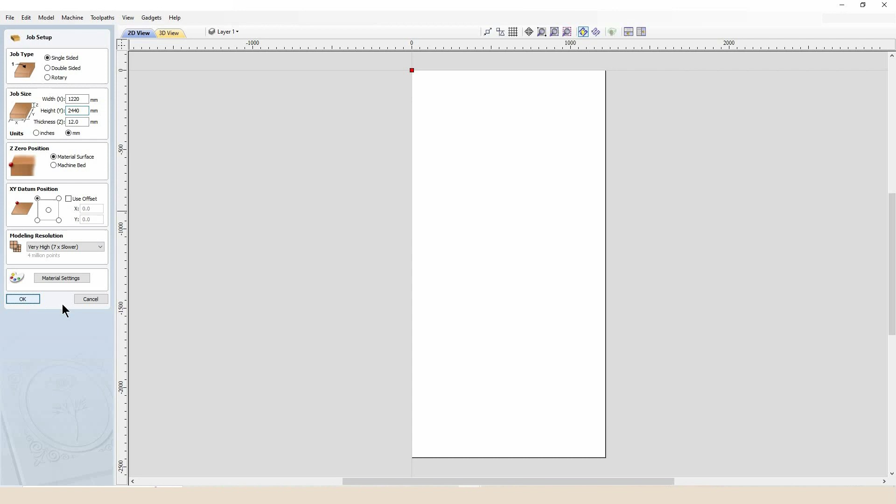So we're going to dive straight into the Gadget area of VCarve Pro, and we're going to go down to Box Creator. Now I want to show you an example of how Box Creator kind of functions. Now the first thing I'm going to do, it's going to throw up an error, because our box components will not fit completely on this sheet.

Okay, so these are our basic parameters. We're going to create all sides to our cube. We're going to be using a 5mm end mill for this one, and I would like a tab lid and square tabs. So for this particular box, we're going to make an allowance of 0.1. You are probably going to need to play with this allowance feature to get your finger tabs to fit exactly how you want them. So you'll notice it's now saying that it couldn't arrange quick enough, which basically means all of these parts don't fit on this sheet.

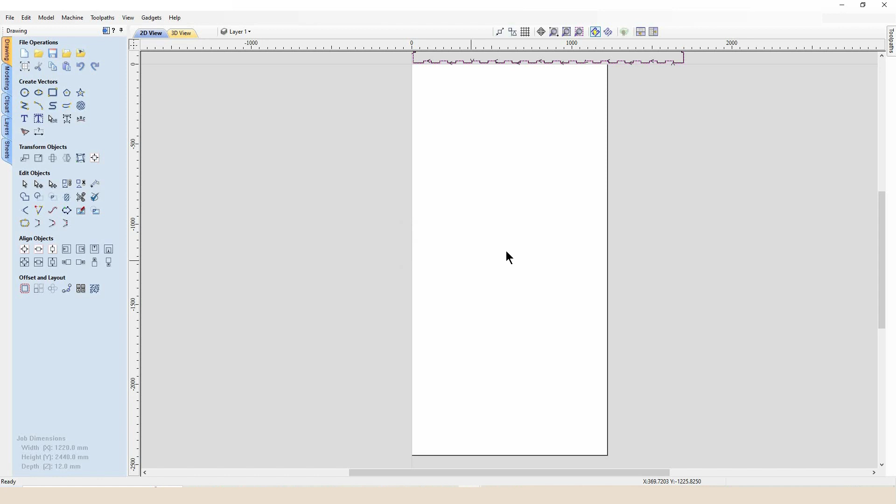So I'm going to delete the toolpath that is created, and I'm going to delete all of the parts. Now, the quickest and easiest way to get around this is to create a much bigger workspace. So I'm going to change that to 8-foot by 8-foot square, and that should be big enough now.

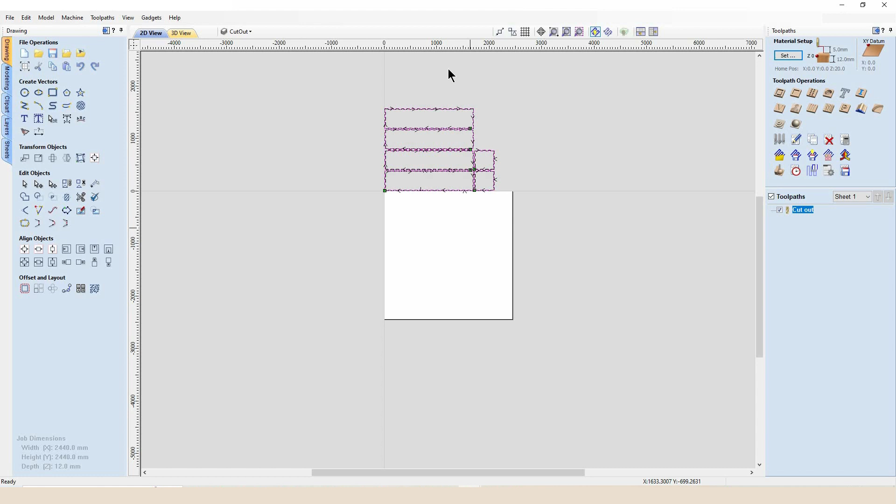When I go back into our Box Creator gadget, it's kept our 1685 in width, our 375 in height and depth. It's kept our joints. We just need to re-input the 0.1 allowance. We want a tabbed lid and we want square joints. Now what it's done is it's repopulated all of our parts.

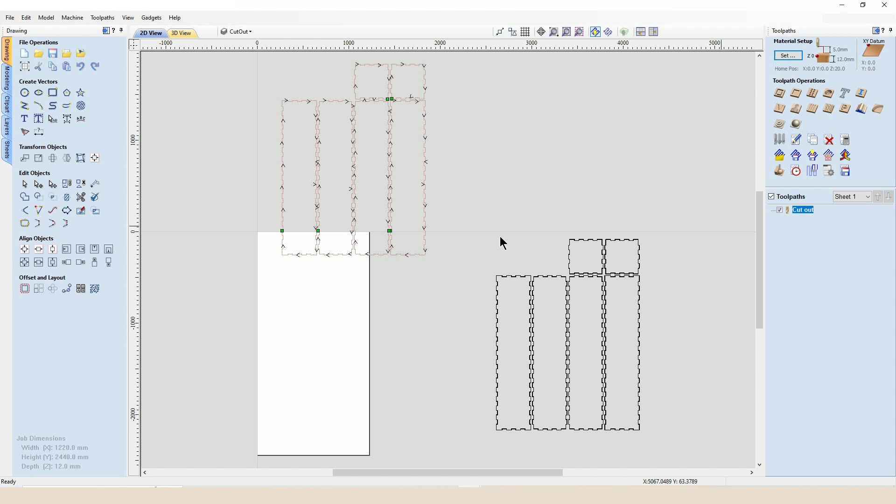So I'm going to pick those up and I'm going to turn those 90 degrees. And if I come across to our toolpath and recalculate that, that's now going to recalculate all of our parts together. So for this exercise, I'm just going to drag it down to here, out of the way. And I'm going to come back over to our job dimensions and I'm going to change that back to an 8x4 sheet. Okay, so that's a really easy and quick way to cheat the system and effectively get what you need. All right, so you can see there's all of our 50mm tabs, there's all of our box components.

So the next step is going to be creating some smaller boxes, which is going to sit on the inside of our flight case, and that will be used then to hold our X-beam in position. So for this box, we are going to have a width of 400mm. We're going to have a depth of 95mm. We're going to have a height of 80mm and a joint width of 20mm. Again, we're going to have the same 0.1 allowance. We're going to use the same 5mm end mill. And again, selecting the square tabs and a tabbed lid.

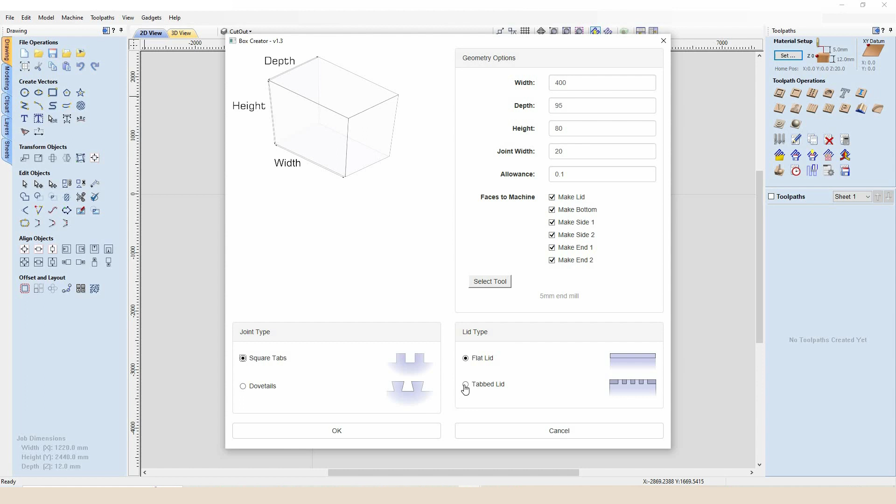And you will see there is our parts. So we'll orientate those by 90 degrees. And we'll drop those there. Okay, again, I'm quite happy to delete this pre-predicted toolpath because we're going to do something quite clever now, which is we're going to re-nest and we're going to use VCarve then to tell us how many components we can fit into one sheet.

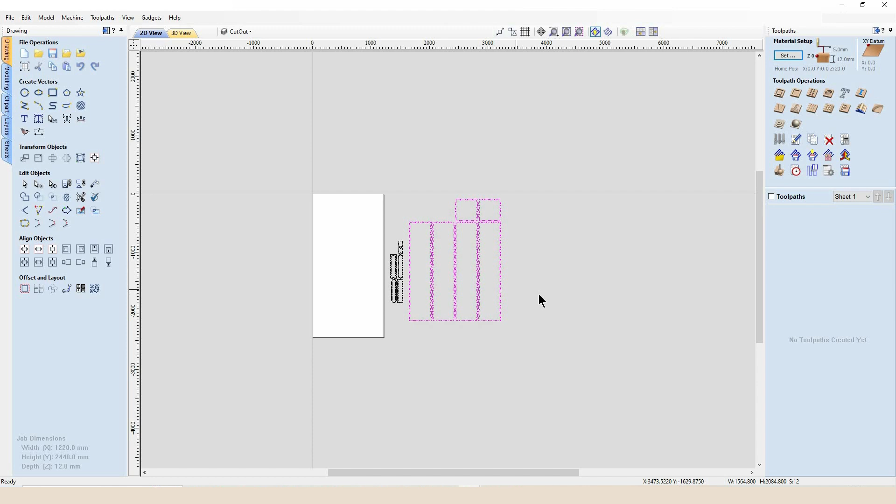So if I start at the bottom right of my screen, hold the left mouse button down and come up and drag and select all of those parts, I'm going to come across to our nesting function. Okay. So we'll start off at the top. We've got our 5mm tool. We want to create a clearance between each part of 8mm, and we want a border gap around the edge of our sheet of 20mm, which is going to allow us then to fix our sheet down.

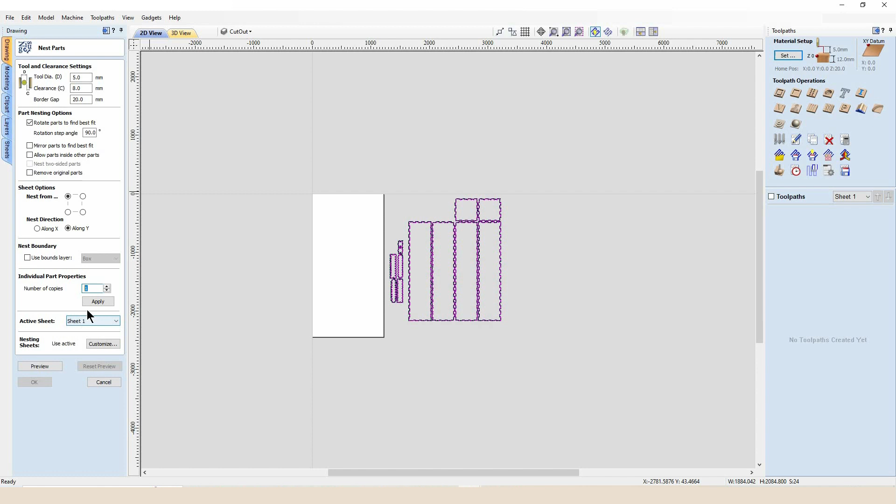Now, just be warned, if you're going to try and cut a part, which is full 8-foot on the sheet, by having the border gap of 20mm, it won't allow you because it believes that part will no longer fit on your sheet. So we're going to allow it to rotate our parts by 90 degrees for best fit. And we want a number of copies. We want just one for the time being. So we're going to select apply.

And if we preview that, that will then bring up sheet 2, which has a number of our parts, and then sheet 3. Okay, so I'm fairly happy with that for the time being.

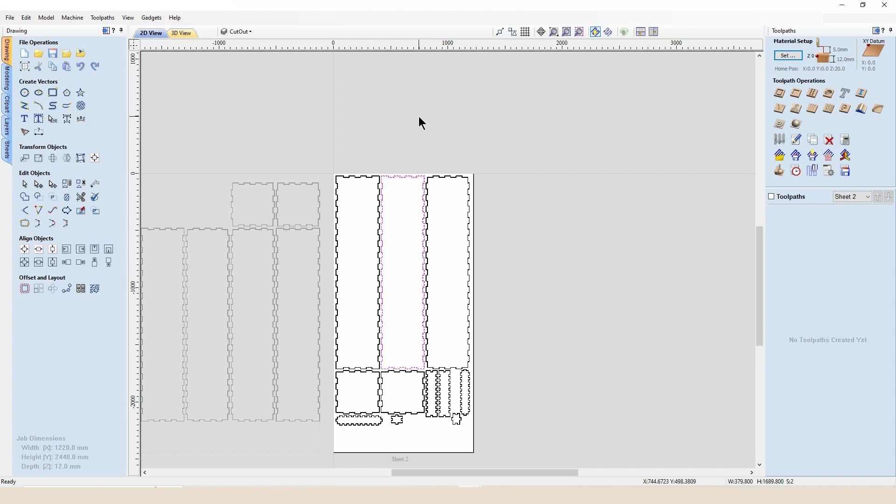However, I'm going to make some changes. So this part here, I actually want on sheet 2, which is going to be our lid. So if I hold Control and press X, then double click on sheet 3, and then hold Control again and press V, that's now copied and pasted that part.

I'm now going to select these parts for our side piece. I'm going to hold Control and press X again. I'm going to come back to sheet 2. I'm going to hold Control, press V, and then I've got the parts in the correct orientation.

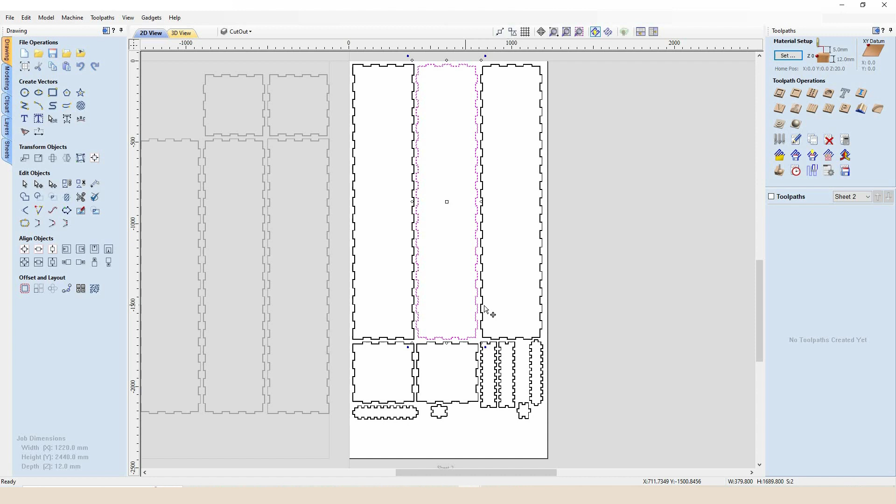So this will be our base, and this will be our 2 sides. This is going to be our ends, and this will be one of the internal boxes. And again, I'm just going to shuffle this around to get it just how I want it. And then effectively we have a top and base and the 2 sides.

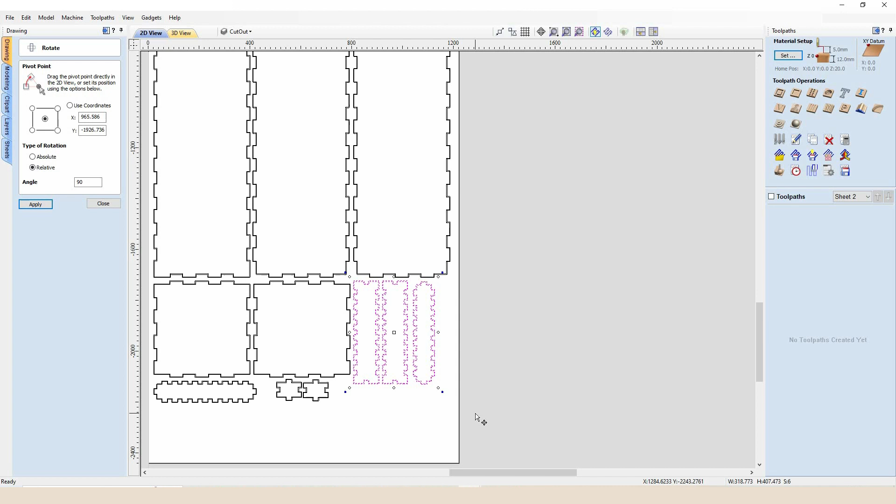Now I need 2 of these internal boxes. So if I just bring this along, shuffle it around so it's reorientated for me. I'm going to select these and hold Control and press C for copy and then V for paste.

And I'll move these bits along here out of the way, just so I know what I'm looking at. And I'm going to hold Control again, press C and V to recopy these parts. And now I'm just going to shuffle these around and reorientate them so they fit on our sheet.

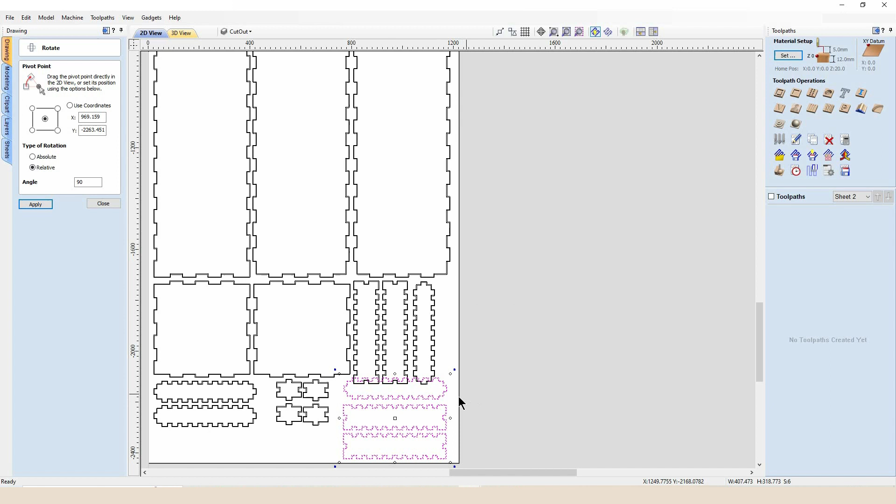Okay, so very simply, that is the main components of our job. We're now going to start to add some of the different features to make this flight case function.

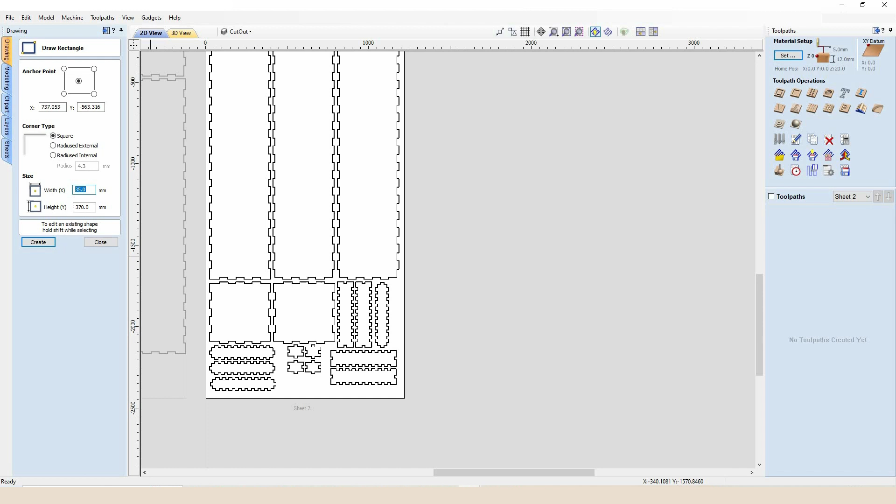So I'm going to start by adding the handle holes for our flight case handles. So those handle holes are going to be 130 millimeters by 80 millimeters. And I'm going to drop one in there, and I'm going to drop one in there.

So if I start by selecting our first handle hole and then holding shift, I'm going to select the actual vector. I'm going to come over to our alignment tools and I'm going to center the object within this vector. So that's very, very simple and easy.

Again, I'm going to select this handle hole and I'm going to select this vector. And again, I'm going to center that one. That's those objects done. The next thing I need to look at is then going to be the cutout apertures for our flight case wheels.

So I'm going to create a square with square corners, and I want, well, I'm actually creating a rectangle. I want our rectangle to be 35 millimeters on the x-axis and 55 millimeters on the y-axis. And again, I'm going to drop one there, and one there, and one there and one there.

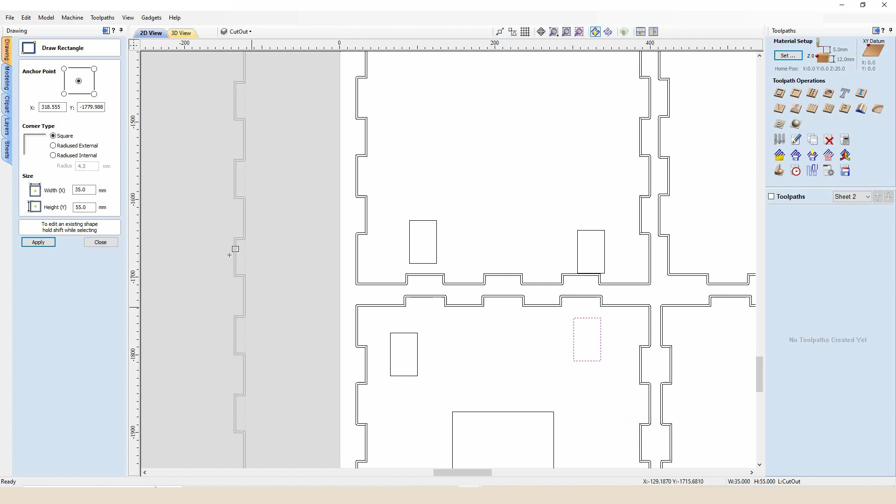So with a little bit of shuffling, I'm going to select one of my flight case wheel apertures and I'm going to select the vector which it will sit within. And I want it to sit in line with the bottom.

All I'm going to do now is using the direction keys on the keyboard, I'm going to shuffle this into place so it sits bang on this vector line. So you need to zoom in and zoom in and zoom in. Once you get used to doing it, it's not too bad. It's a little bit fiddly at first.

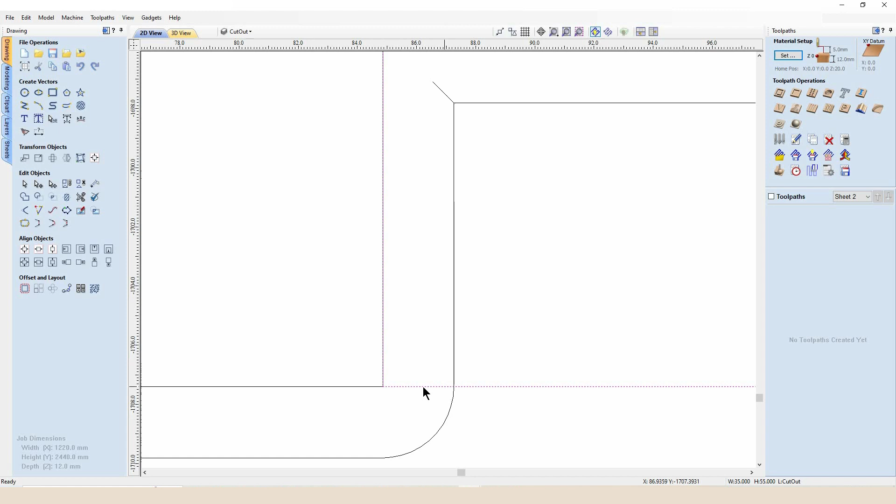Okay, so I'm really happy with that. As I zoom in now, I'm very, very close. I'm onto that line. So you'll notice the new vector, which we're going to cut, our little internal profile, sits perfectly in line with the bottom of the vector. And I'm going to orientate it to sit inside of this tab here.

So we'll do exactly the same again. We'll select this hole. Holding shift, we'll select our outside vector. And we'll use align to the bottom. And we'll just nudge that across until we're happy with the placement where these two vectors are sitting smack bang over the top of each other.

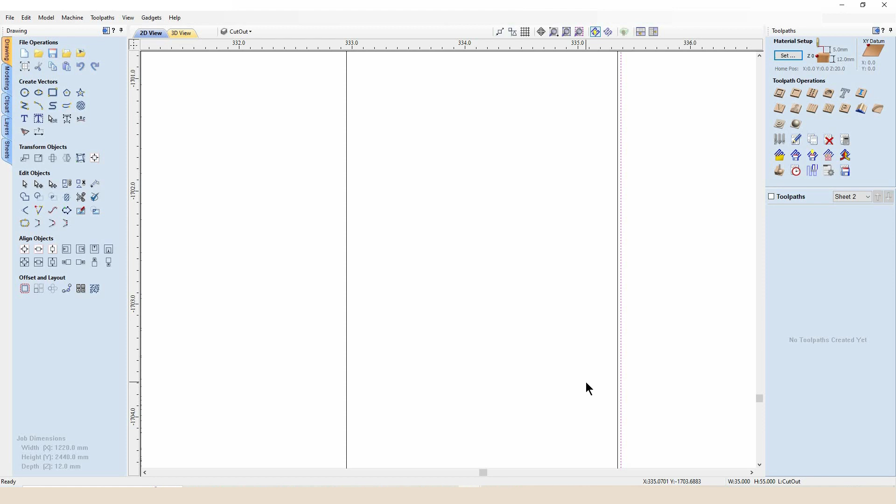So again, for these bottom wheel cutouts, we'll follow exactly the same principle. We'll select it to the top.

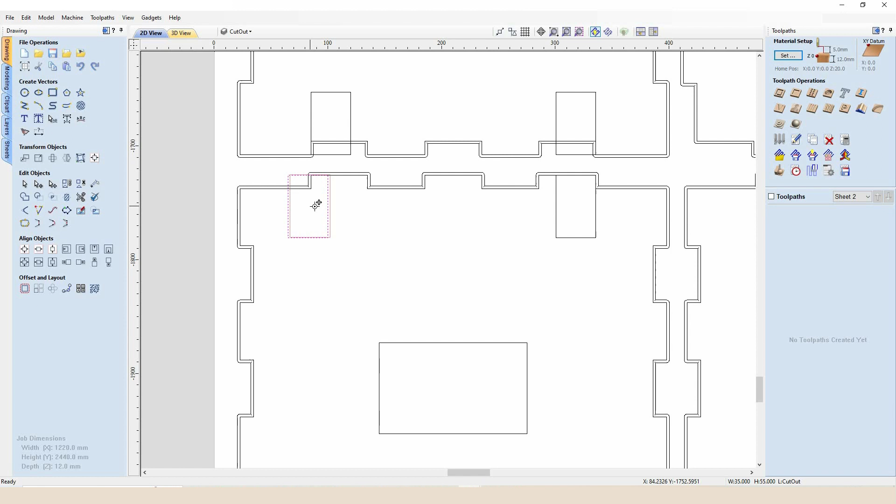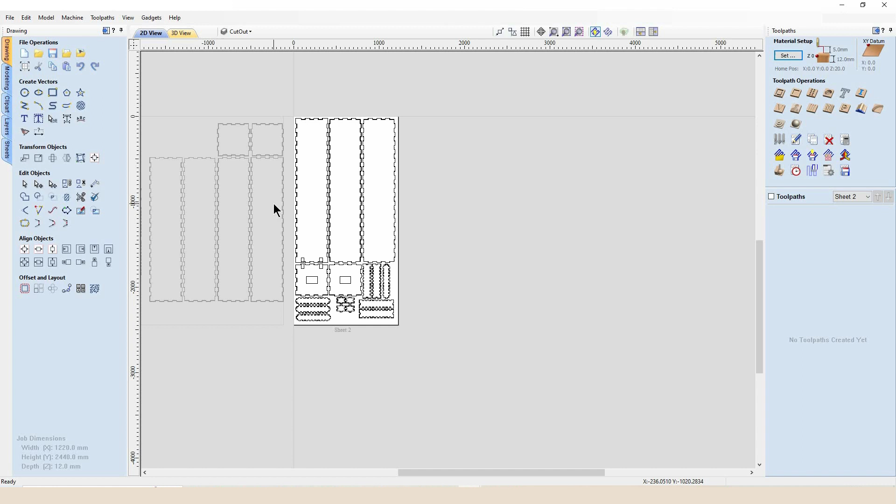At this stage, I've got all of the main components designed for the outside of our flight case, and I've also designed the inside parts which are going to hold our X-beam inside the flight case. We've created some of the different handle hole features and the internal cuts for our small wheels. We're going to go ahead now and design the extra auxiliary parts which are going to go inside the flight case.

So the next part I'm going to design is some plates that will sit inside of the X-beam and hold the upper part of the X-beam into the flight case. We're going to have two parts at 180 millimeters on the X-axis and 390 millimeters on the Y-axis. So I'll drop one there.

We're going to make some modifications to this to fit over the inside of our X-beam, there's a small electrical feature that sits there. And what we're going to do is create a cutout on all 4 of the corners on both parts, so no matter how you've got this part configured, you're never going to clash with it.

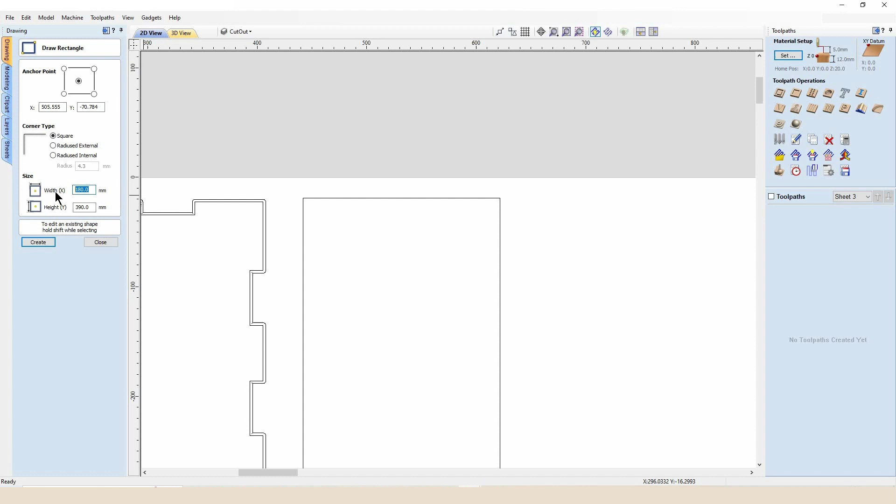So I'm going to make a small extra box, which is going to be 15 millimeters on the X-axis and only 10 millimeters on the Y. And we'll just copy and paste, and set one up for each of the corners.

Again, using the alignment tools, very simply, we're going to select our part, select our outer vector, and drop those into place. Nice and simple, and it's accurate as well, that's the main thing.

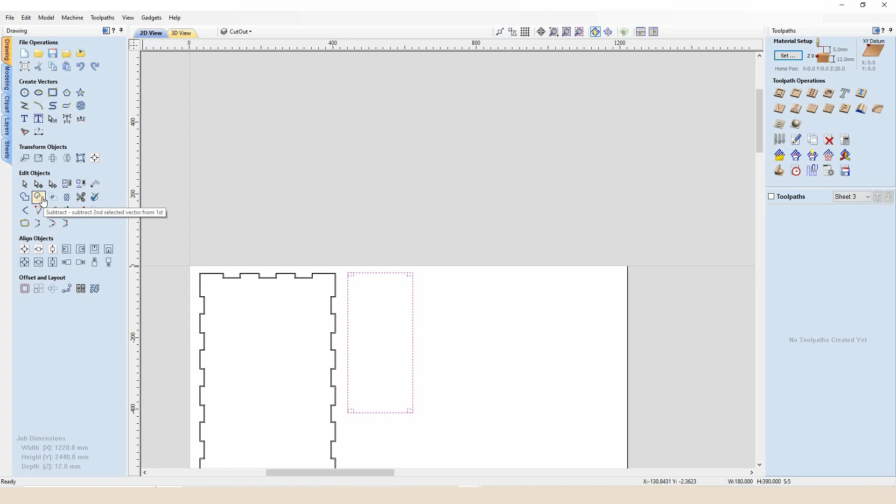So if I start again down the right-hand side, holding the left mouse button down, I can select all of those, and I'm going to come over to the subtract second selected vectors. And what it's done, very quickly, is cut out all of those extra vector lines that we didn't want. So that's nice and neat and an easy, quick way of doing it.

So we're going to cut some holes in this box now, that is going to sit over some internal bolts. So we want a 9mm hole. So we'll select that one there.

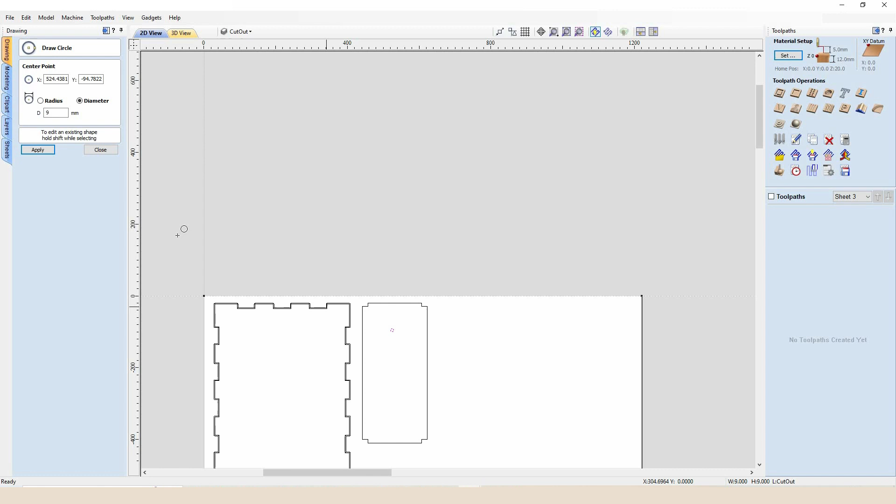And these holes are going to be offset, which will give you a center measurement. They're going to be offset by 261 millimeters. So I've got both of those holes there, I'm going to group those.

For the moment, I will just center them into my board. Okay, so now I'm going to take those holes, and again select our outside vector, and center those 2 holes to sit within this little fixing plate.

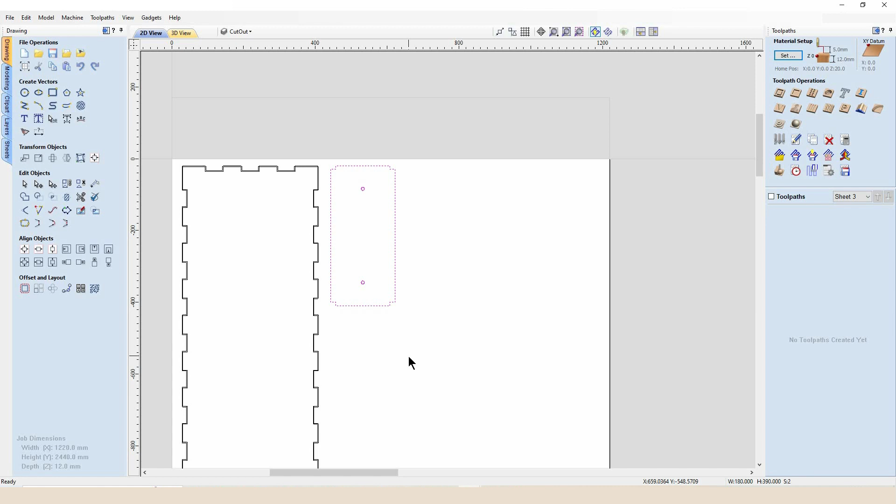Okay, so nice and simply then, I'm going to grab both of these. I'm going to press G on the keypad to group them together, and I'm going to... no, then I'm going to array copy them.

I want 2 of those on the X-axis, and I'm going to gap them to be 7 millimeters apart. Okay, so nice and simply, we're going to do that.

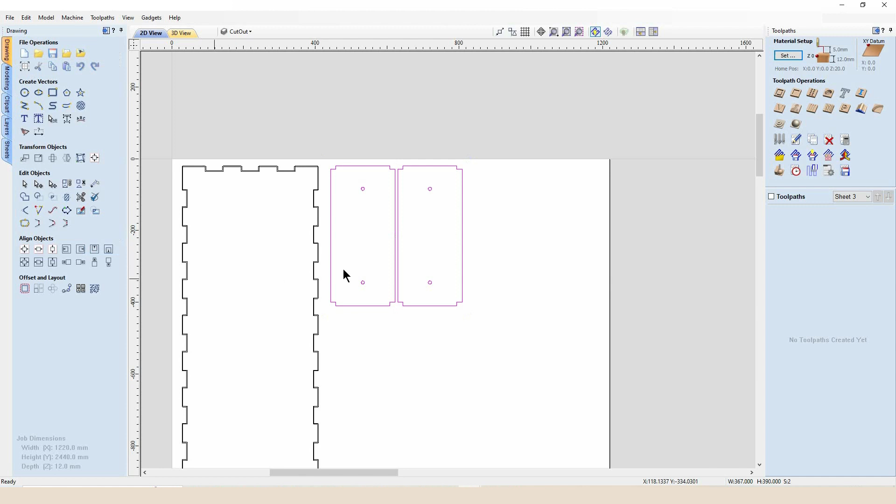And I'm just going to pick up all of these parts now, and move them across so they're closer to minimize our offcut. And if I press U, that's going to ungroup those parts again so they can all be moved singular.

Okay, so now I've got those parts designed, I'm going to pick them up, and for the time being, I'm just going to move them off the sheet, ready for some better orientation later.

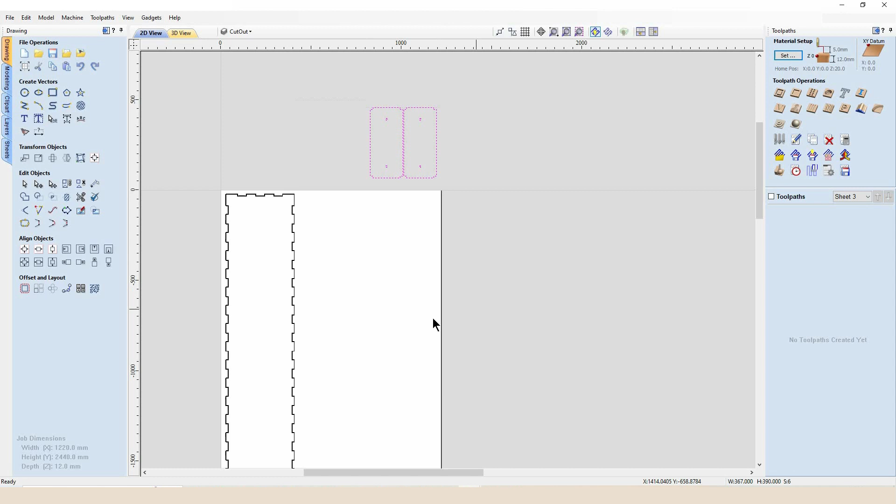So the next stage then is to create some strips that are going to sit on the inside of the lid, and will just help sort of keep everything nice and firm when it's all together, and help you align the lid when you're putting it back on.

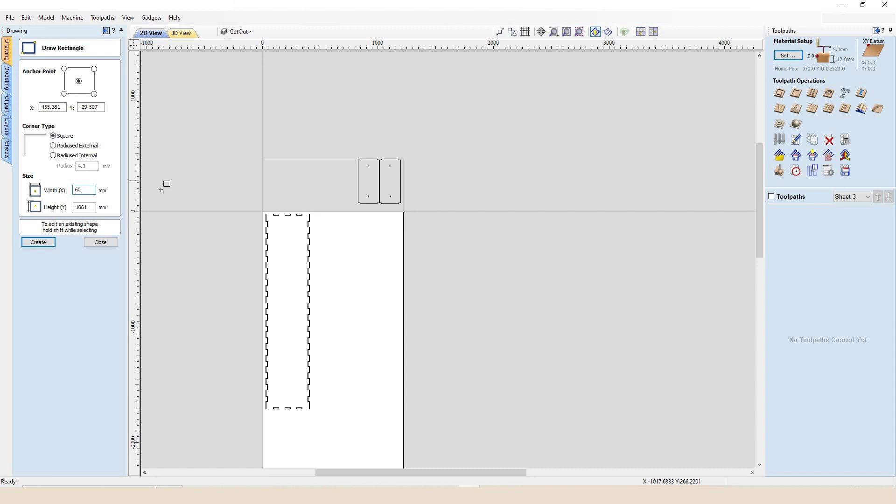So the first part I'm going to make will be the long strips. They are 1,661 millimeters in length, and I'm going to make all of these strips 60 millimeters wide. So if I drop one of those onto my sheet, I can then select this first vector and get that to run nice in line, so all of our cuts will be nice in line.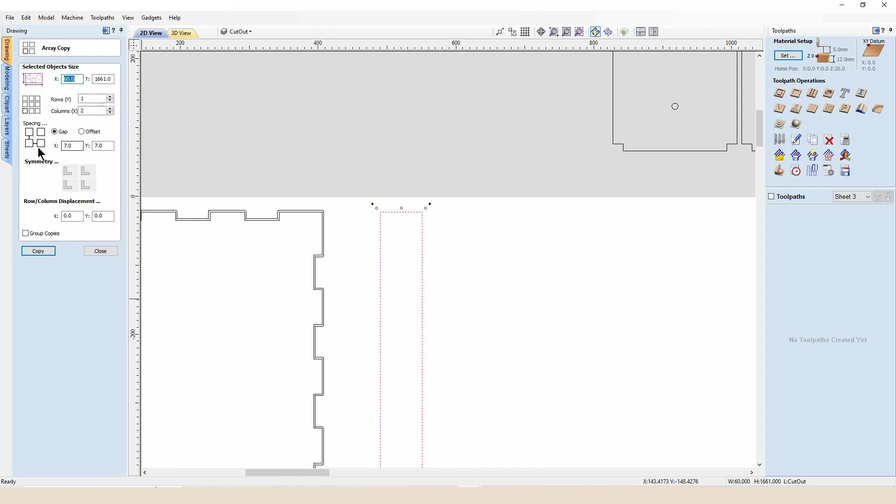And I'm going to pick up this one, and again, using the array copy, I'm going to ask for it to copy 2 of those across the X-axis with a 7 millimeter gap. So we've got both of those. I'm going to bring them along and just move them closer now to our lid part.

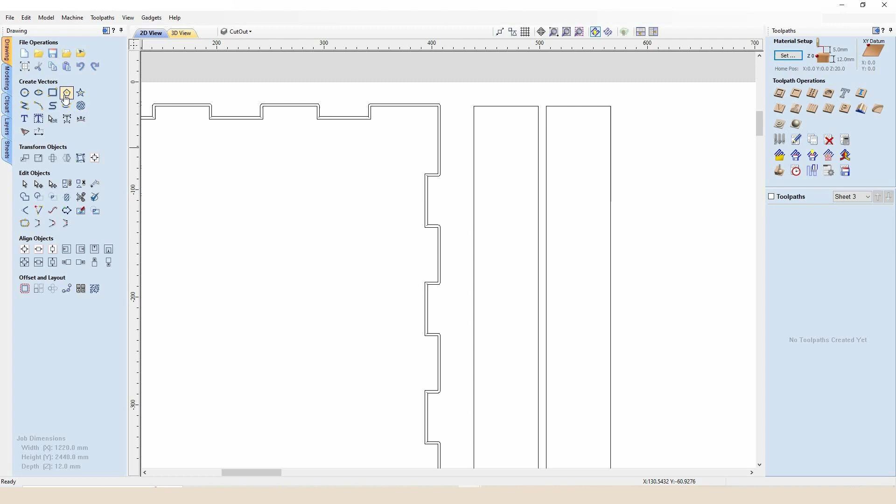I don't want to move them too close because I'm going to have these little square parts left on our sheet. If I move these too close, these will become small little cubes that might pop out of your sheet and interrupt your cut. So the next step is to create the little width strips. Keeping that X-axis at 60 mil, we're going to change the Y-axis to 328 millimeters.

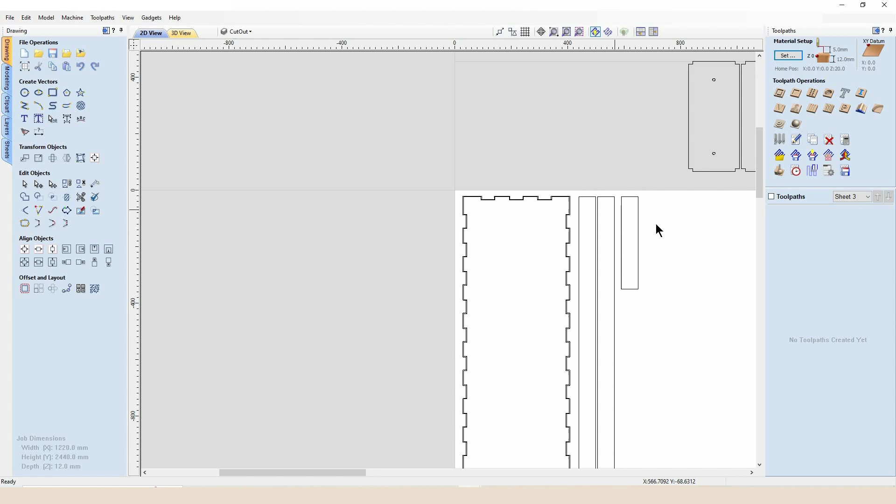For the time being, I'm just going to drop one over here and move that out of the way. I'll select this one again and get that to run in line. Then I'll pick up that one vector, come back to our array copy, and using exactly the same parameters again, we now have two.

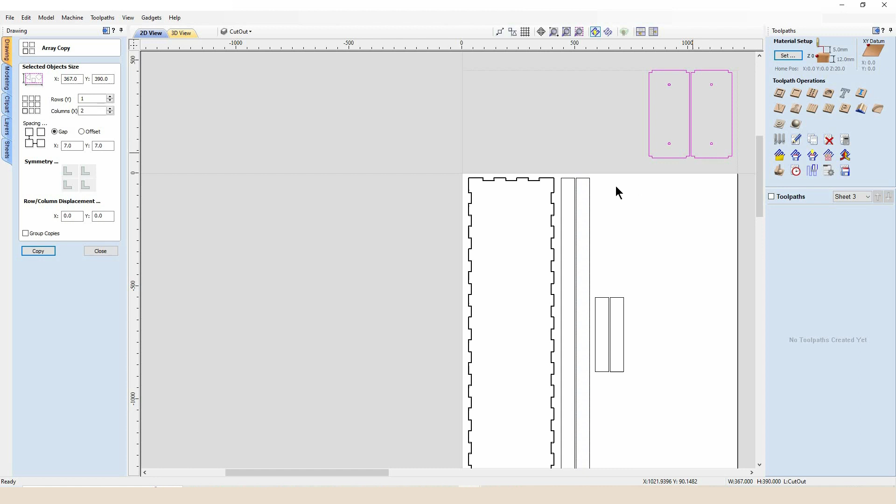Okay, so I'm now going to start to orientate those on our sheet, and I'll pick up all of these parts again and line those all up.

Now what I can do is make a 7 millimeter long box and just drop it there, and use that to start to align our parts. So I've got my 7mm box added.

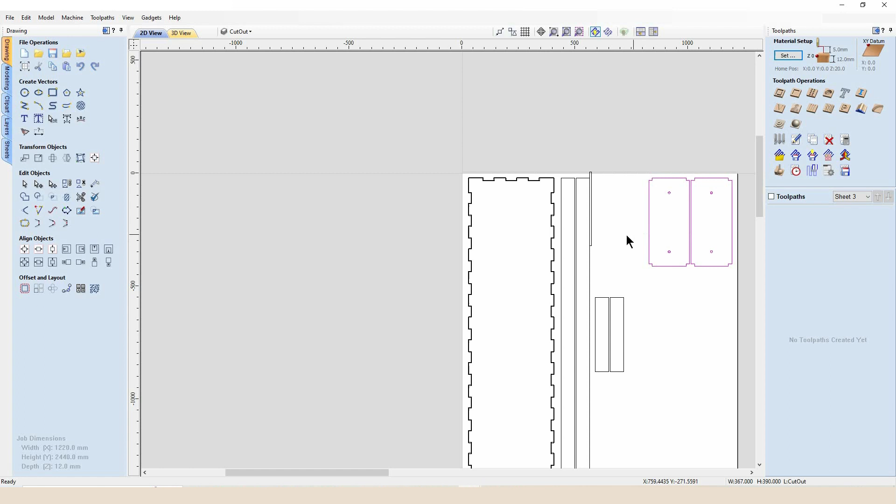I'm going to nudge that up against this vector, select this one and our little 7mm scrap, and bring that across so that's nice and efficient. So we've got nice even 7mm gaps on everything.

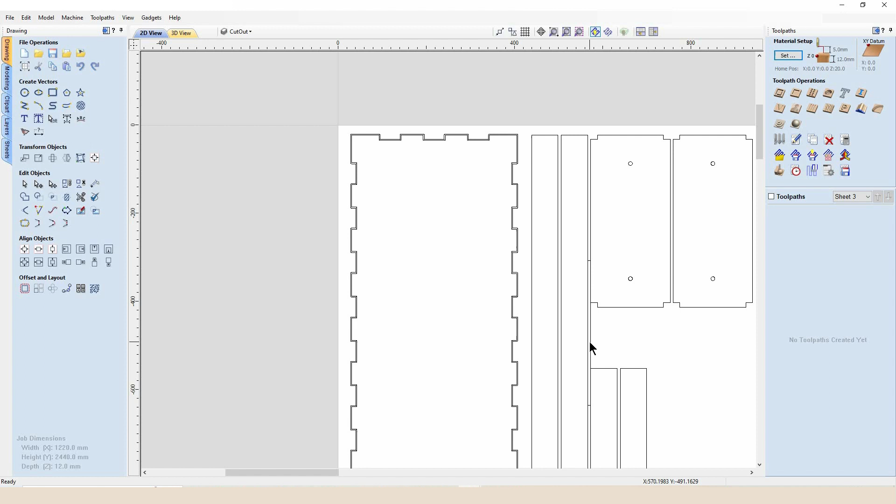I can bring this down, pick up these two vectors, group them together, and get them to align nice and neatly with our 7mm spacer. For the time being I can just delete that 7mm spacer and I've got nice even 7mm gaps around everything.

I'll just bring these parts up a little closer and we'll ungroup those. I'll come back to these spacer parts for the time being and just ungroup them. There we go, nice and simple and an efficient use of our sheet.

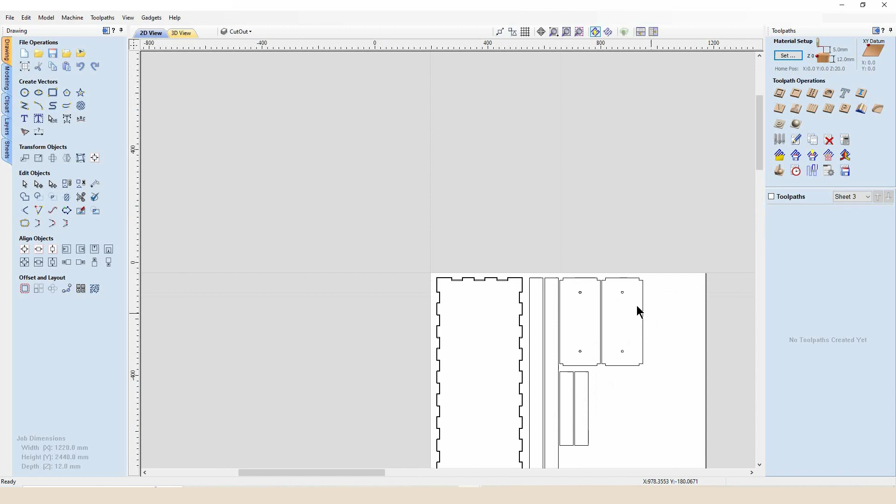So the last thing I would like to create is some spacer packers, which are going to sit on the inside of our little lids. Those spacer packers are just going to create a gap between our X-beam and our internal boxes for our nuts and washers to sit. So I'm going to want four of those.

So the first thing we'll do is create one, and they're going to be 35mm wide by 370mm in length. And we'll drop one down there.

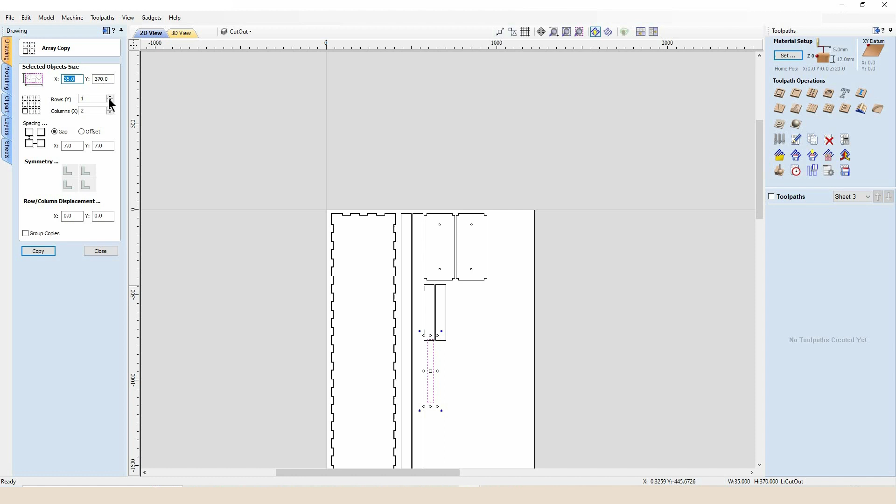Again, using our array copy, I will select four of those. Nice and simply they've all popped down in line. So I can select all of these four and just nudge them along till they run in line with all the rest of our parts.

I'm making sure I've got adequate spacing on the y-axis, so I can add some tabs for some strength. That is all of our internal accessories created then, which is going to finish off the inside of our flight case.

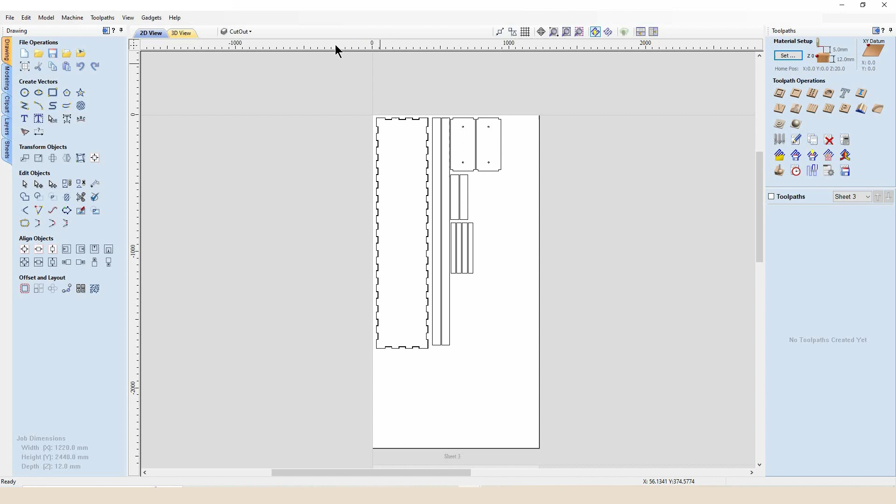So now we're going to go back to our second sheet firstly, and we're going to create some very simple toolpaths. You'll notice any vectors we create with the box gadget is going to be the actual box vector itself, and this secondary vector with this small line here is going to be the line that will create our toolpaths on.

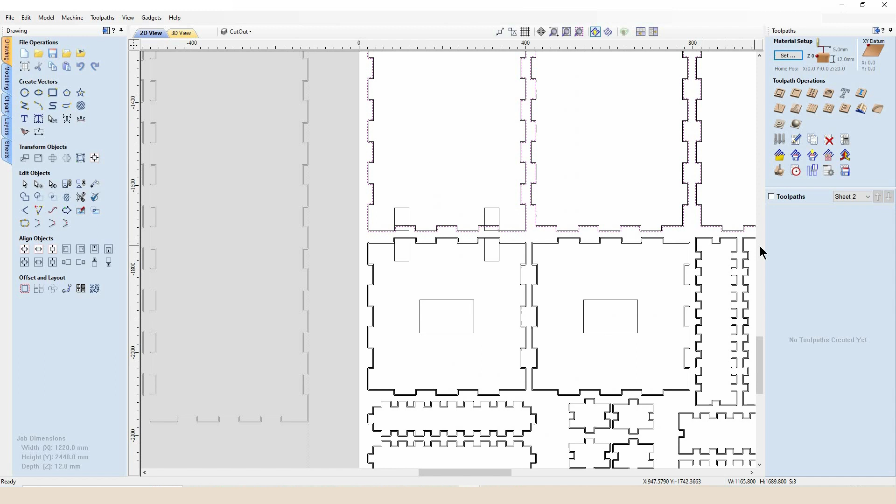So I'm just going to hold shift down and go and select each one of those vectors one at a time. Okay, so now I've got all of those outside vectors selected.

I'm going to go to Profile Toolpath, and we are now going to mimic exactly what the box creator gadget will do. So I want to cut 1mm into my spoil board, making sure I've got a 13mm depth of cut.

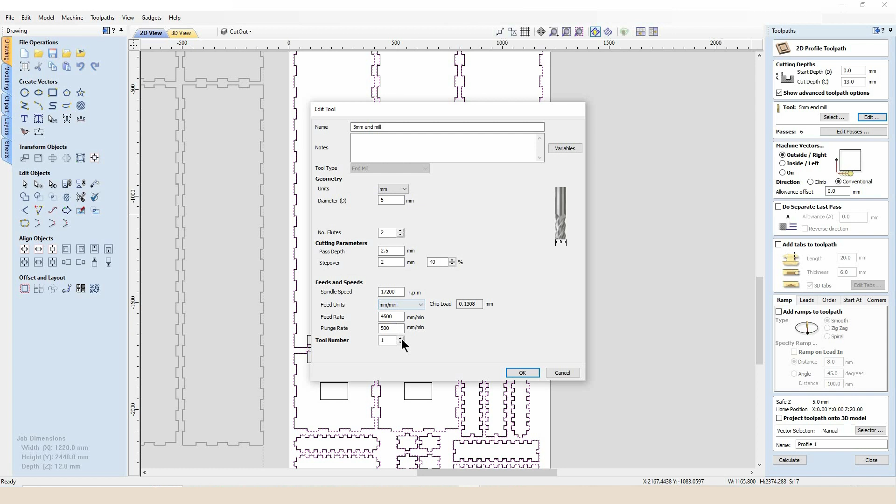I'm going to select my 5mm end mill, and just check that I've got 17,200 RPM. I'm cutting it 2.5mm per pass, running at a feed rate of 4,500mm a minute, or 4.5 meters. And I want to cut on the line.

Okay, so that's very specific in regards to the box creator gadget. That cutter is going to straddle the line and cut on the line. I'm not going to do a separate last pass because that's going to make our box effectively smaller.

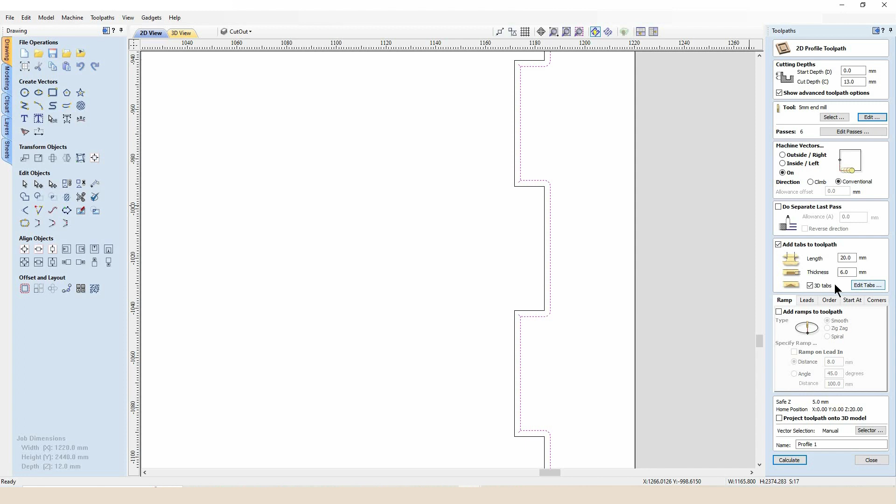And I'm going to create some tabs at 6mm high by 20mm in length, and I want those to be 3D tabs. So the box creator gadget is now going to throw up all of these tabs.

In a minute I'm going to go around and reselect and deselect certain tabs to get everything exactly where I want it, because there's a lot, and I'm not happy with the placement of everything. But for the time being, just to make sure we've got some tabs, I'll leave that selected.

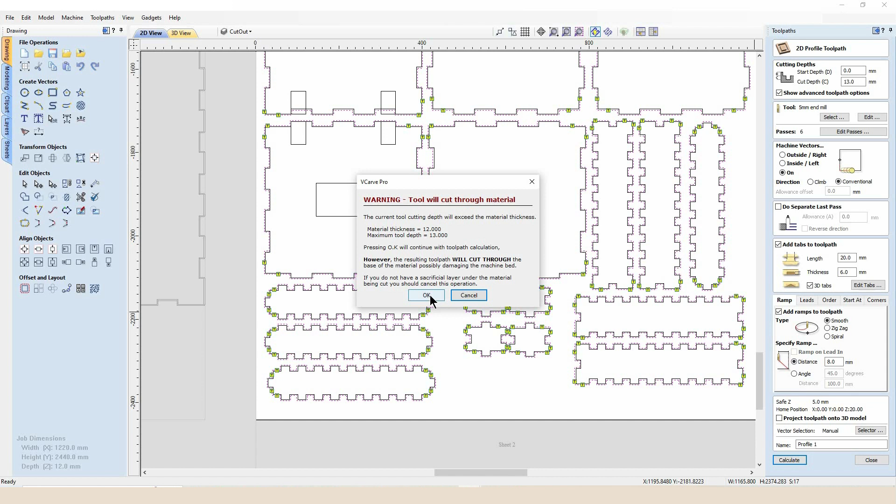And I'm going to select ramps. I want a smooth ramp, and for this particular project I'm going to do it 8mm in length. Now as I press calculate, it will throw up the warning to say that I'm going to cut through my material, which is okay. And now it's going to project my 3D model to show my preview.

Okay, so as you look at the sheet, we've got all of our parts laid out. We can make sure there's no big blank spaces, which means certain vectors haven't been selected by accident.

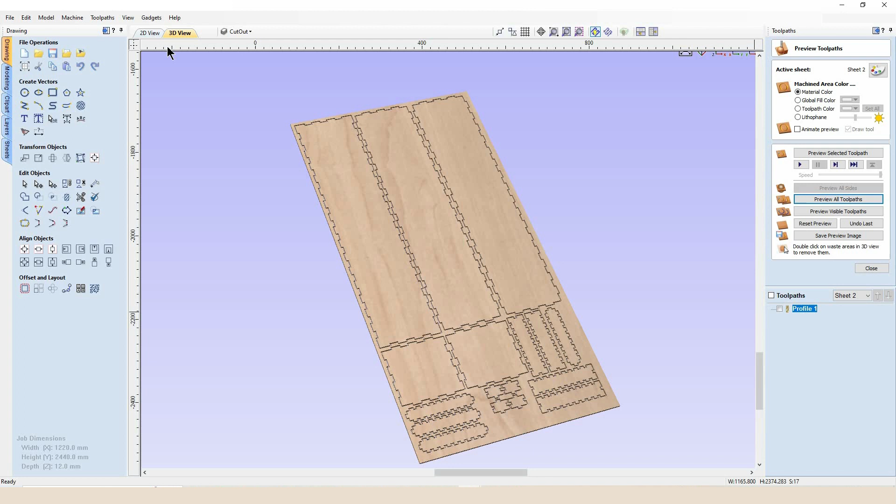I'm going to come back in and double click on this toolpath and go to Edit Tabs. Now, I don't want 4 tabs in the corners, it's too much. As you see, this 20mm long tab will effectively try and wrap around the corner, which is just going to make your life really difficult in regards to cleanup.

So I'm going to take these tabs away, and add the tab there, and then move this tab over to here. So I've got the 2 tabs running in line. That's going to add extra strength to our project.

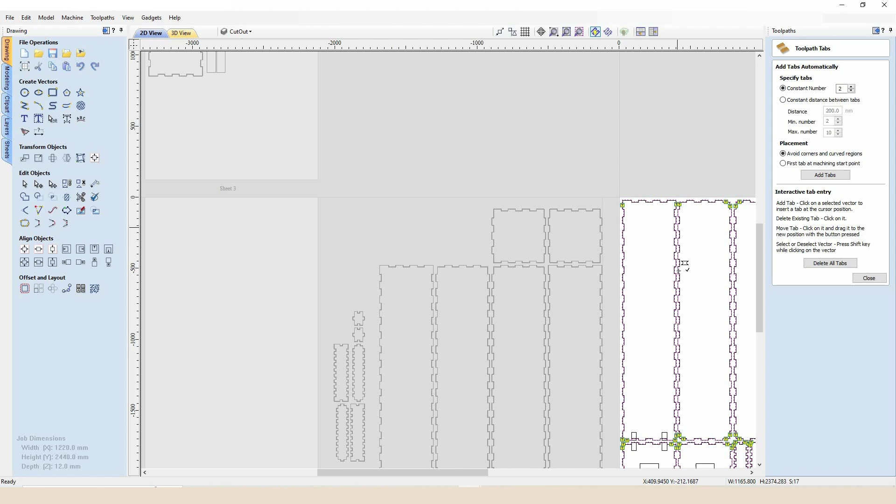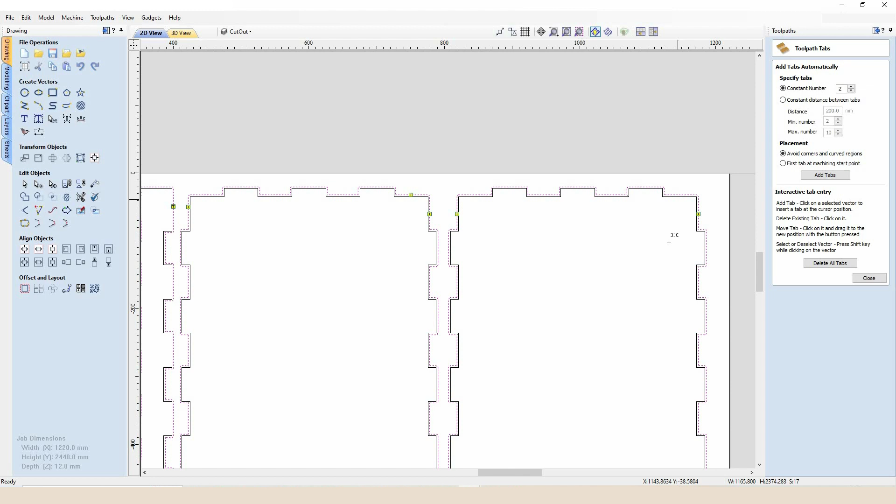Also, because these box parts are so long, I'm going to add some separate tabs in the middle. Again, what I'm going to try to do is line these tabs up so the strength of the wood is left going in nice straight parallel lines. That will be really important on all of our parts where we created our 7mm gaps. So I'm just going to go down through, reselect and deselect the tabs where I want them.

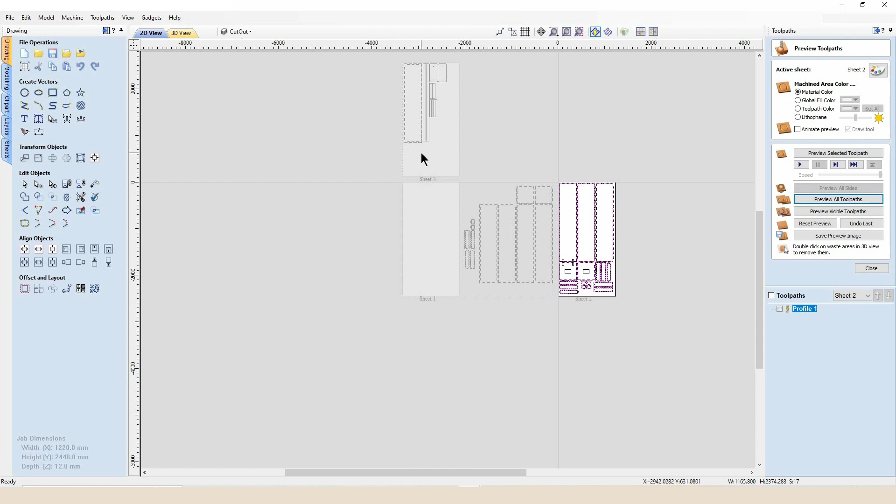Okay, so at this stage, while all the external box profile cuts are already in the memory of VCarve, I'm going to come across to sheet 3, and set up the toolpath for this lid, which again, just roughly checking in, is 13mm deep, 5mm end mill, cutting on the line.

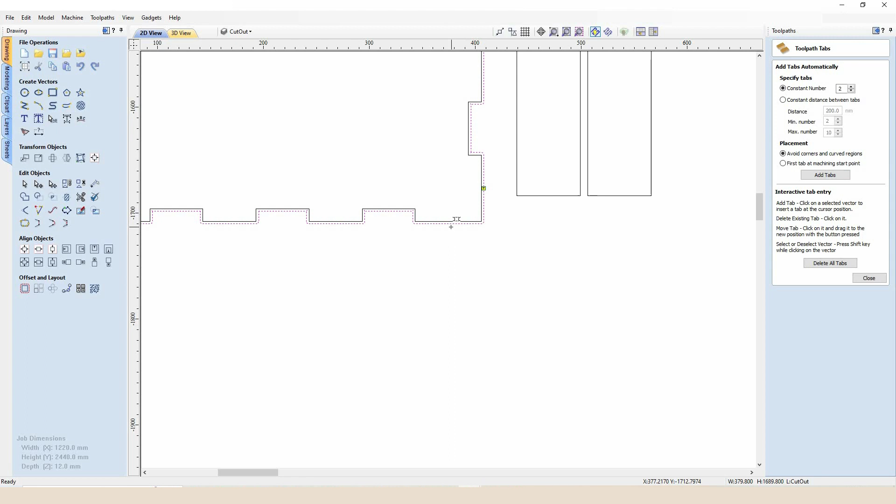And we want to add our tabs, we want to add our ramps. Again, I'm just going to quickly reselect these tabs to be where I want them, avoiding these tabs in the corners and getting those tabs in those nice straight sections. So I'll throw some tabs down here as well, just roughly in the middle of our sheet.

Okay, I'll just name this one box lid.

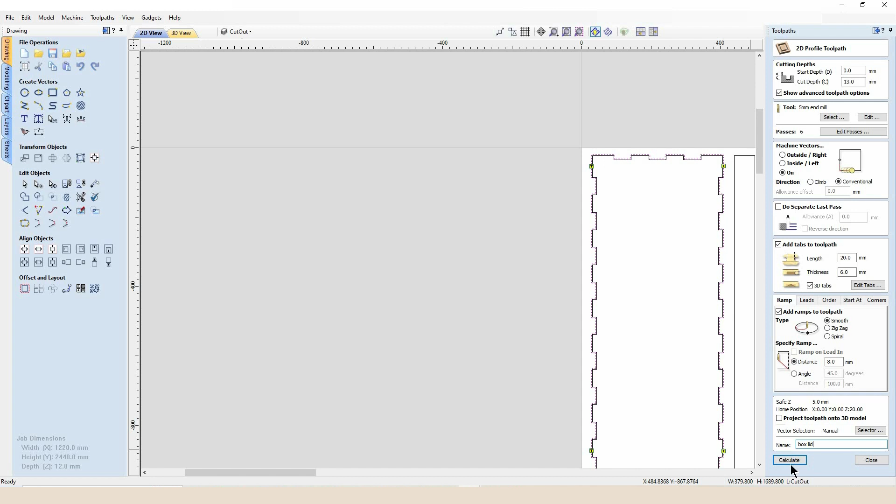So if I preview this file here, you can see there's our cut going all the way through. There's our nice little fillets in the corner. There's all of our tabs.

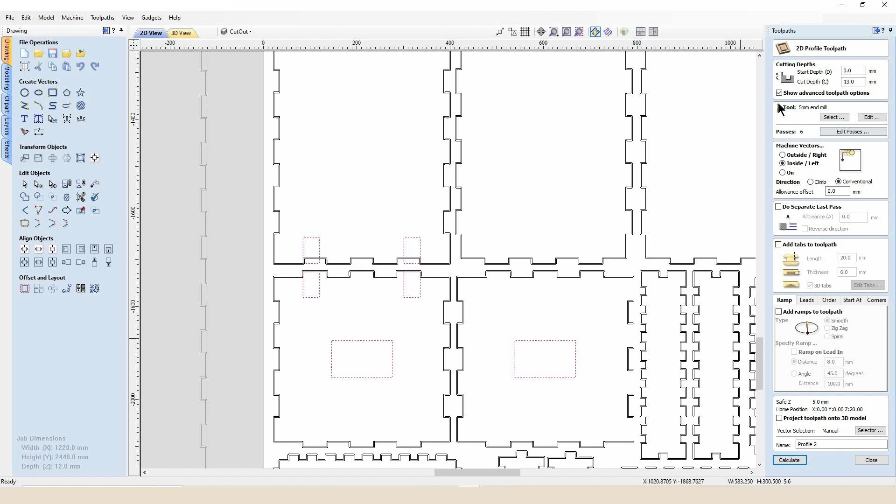Okay, so I can jump back to the first sheet, finish that one off nice and simply now. Holding shift, I'm going to select each one of these vectors, which will be for our internal cuts. And I will create a profile cut, cutting on the inside of our line, same tool, same size tabs.

Call this one then inside cuts. And again, we'll use the same ramping strategy, so all the strategy is exactly the same. Okay, so there's our inside cuts now orientated on our sheet.

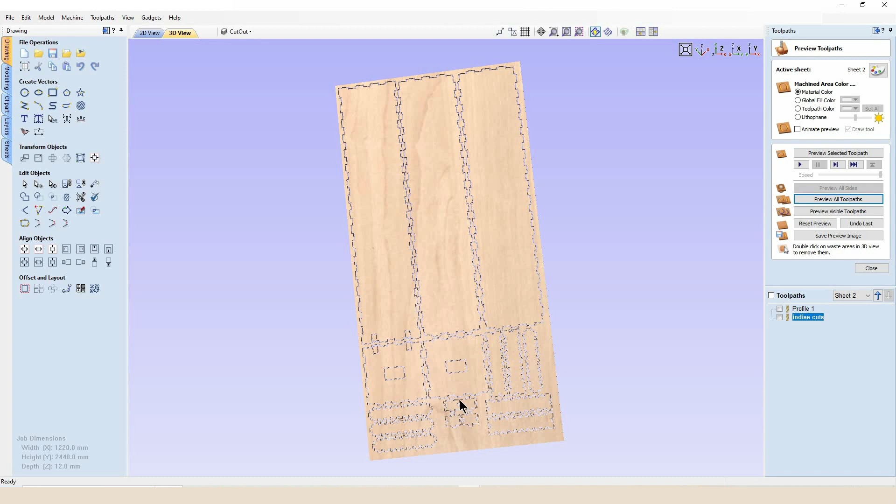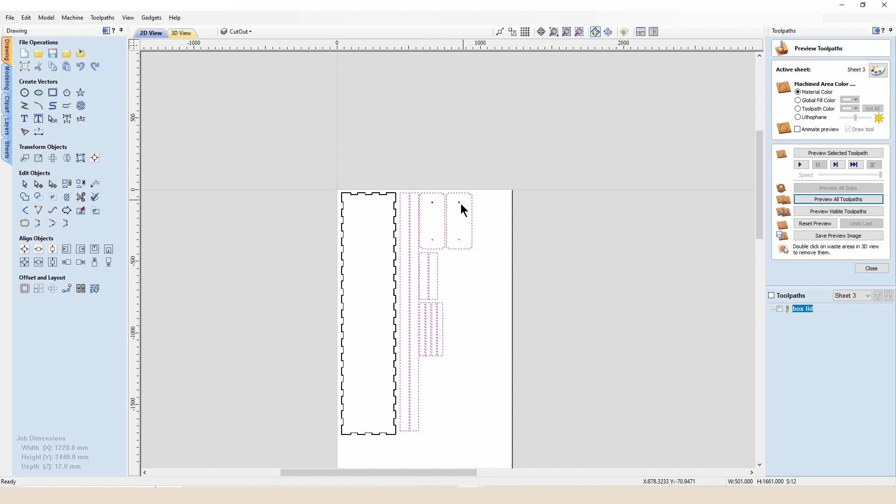All right, so the last toolpath to do is going to be for these extra accessories now. So you'll see now why we've created these different 7mm spaces around everything. Again, if I start at the bottom by holding the left mouse button, any vector I'm touching will be highlighted. So you can see because I wasn't touching these top left holes, you just hold shift and pick those up.

So I'll select the profile path to cut outside of the line. We're going to select our tabs. We're going to select our ramps.

And now what I'm going to do is select an area where I can fit these tabs in right next door to each other. So as each part is cut out, the tab will be adding support, bridging the gap between them.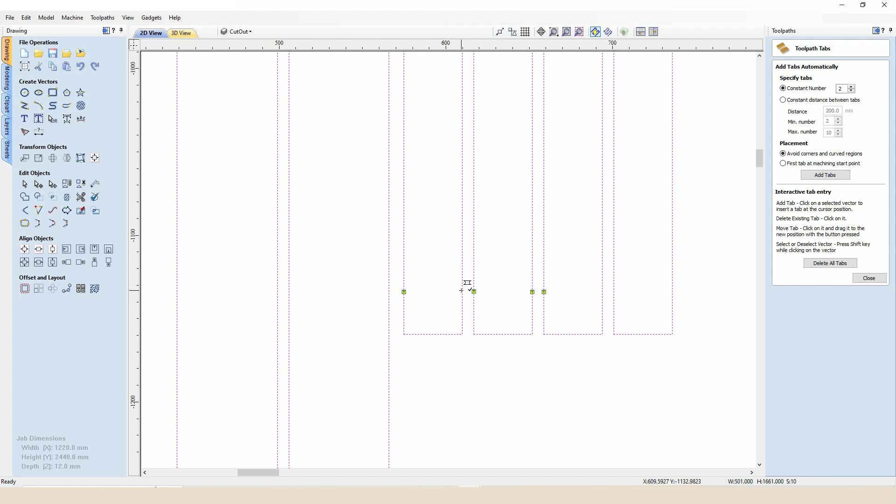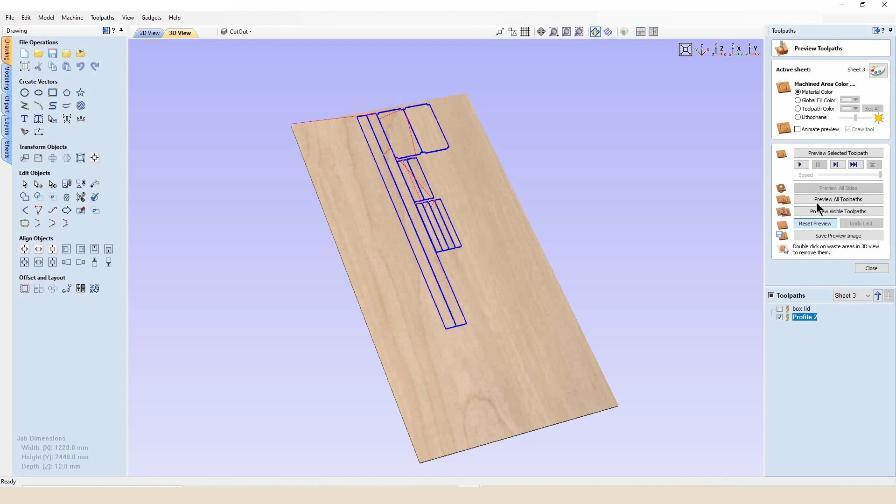Okay, so as I calculate these final toolpaths now, you'll see they become part of our preview. So if I zoom right in here, you can start to see where we're going to have our bridging tabs connecting and adding support back into this stock.

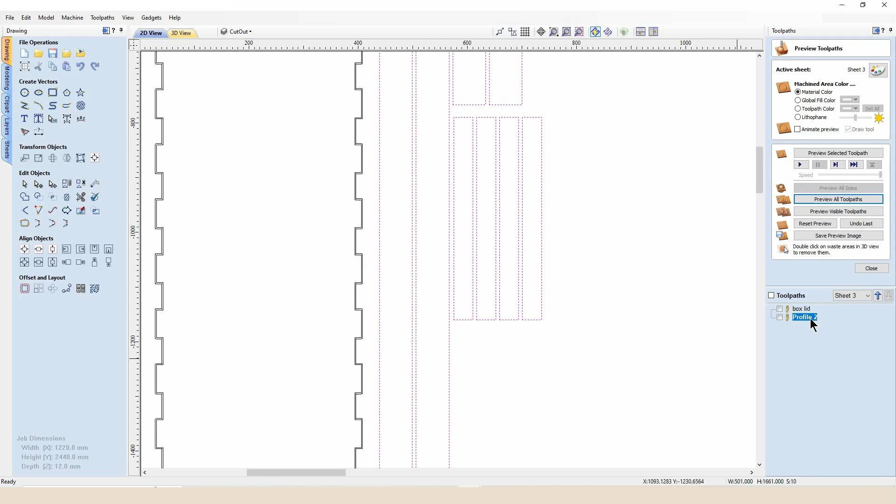But you can also see we're going to have a section here where these parts are going to be cut away. So if I go back into this profile toolpath here, edit our tabs, you can see where I've missed one. So it's always worth going over and analyzing your 3D toolpath, your 3D preview.

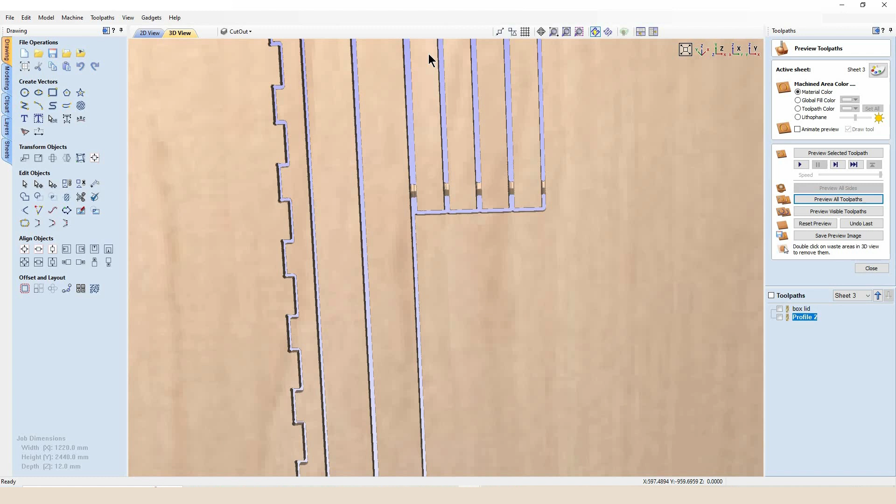Just to ensure that you're not going to have any parts coming loose as you're cutting away at this sheet. Okay, so if I start at the top by holding control on the keypad and holding down the left mouse button, I'm then in a position to move my preview around so I can really analyze that.

I've got a tab, tab, tab, tab, tab. That's all nice and bridged. I've got tabs down here bridging all this together. I've got tabs down here bridging all this together.

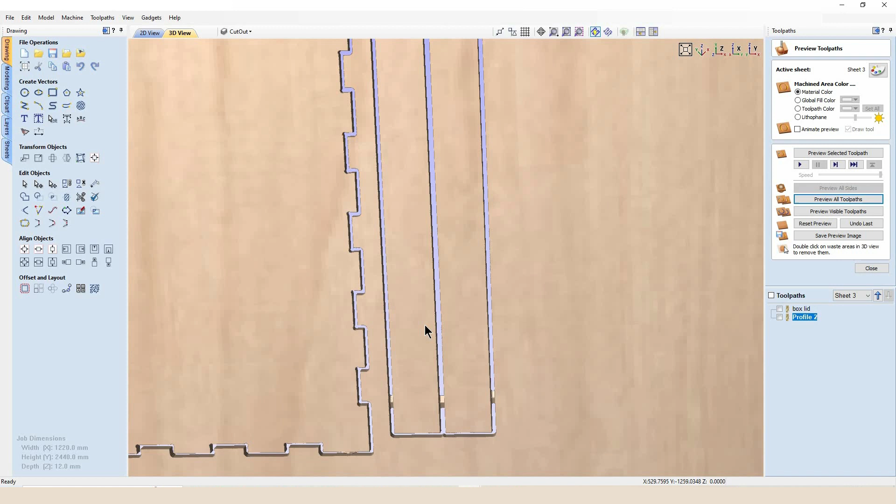So all of our material is going to be nice and supported all the way around. Our box components are going to be held into place. And also what I'm looking out for is to make sure these tabs aren't sitting around corners, because it makes it really difficult to clean up and get a nice finish. So if I turn it this way, you can see all of our lines.

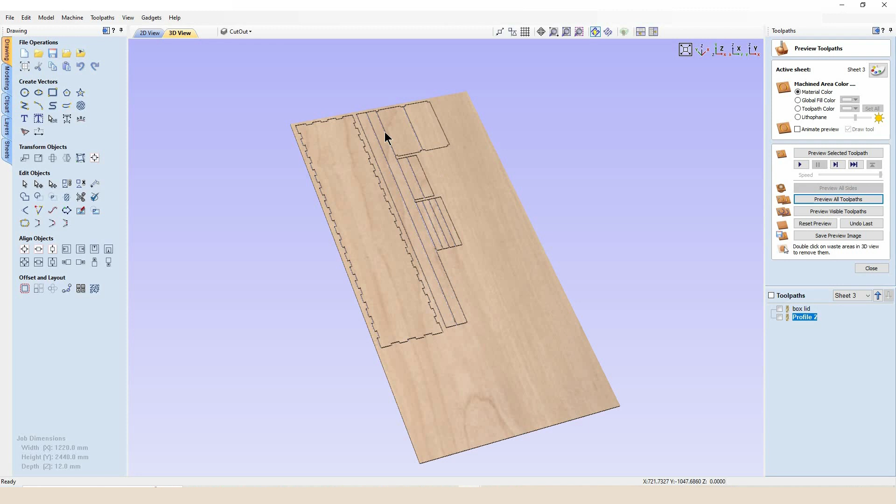So we've just got our last toolpath to create for this sheet, which will be these internal pockets here. Again, same 5mm end mill. I'm not even going to bother with ramping these cuts. And what I find in the past is you can edit your passes.

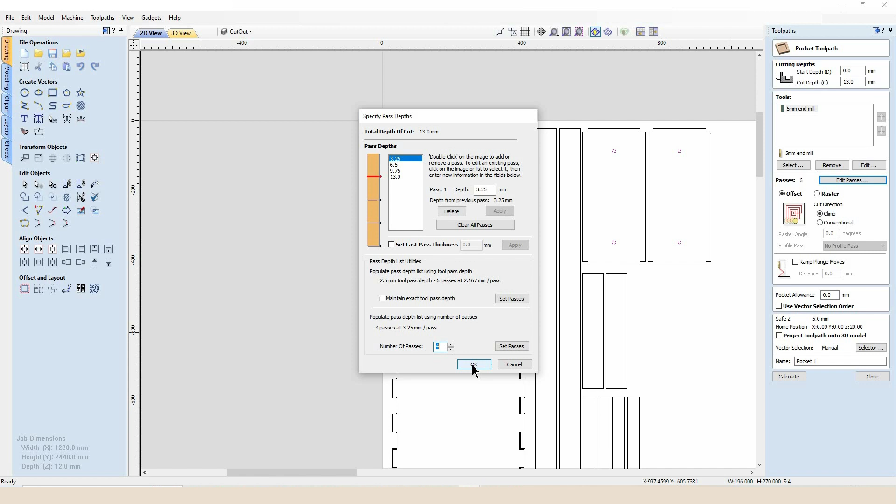This is going to come down in 2.16mm increments all the way for our 12mm sheet. So what you can do is edit the amount of passes it will do. That's going to do it in 4 passes now, which is 3.25mm per cut, which is more than ample. So I'm not worried about a ramp, I'm not worried about any other features. I'm just going to press calculate.

So as you can see now, our SmartBench is going to start from our datum. It's going to move across and peck and pocket out each of these holes in that rotation order. Nice and simple. So just for easy toolpath management, I'm going to come down and rename these.

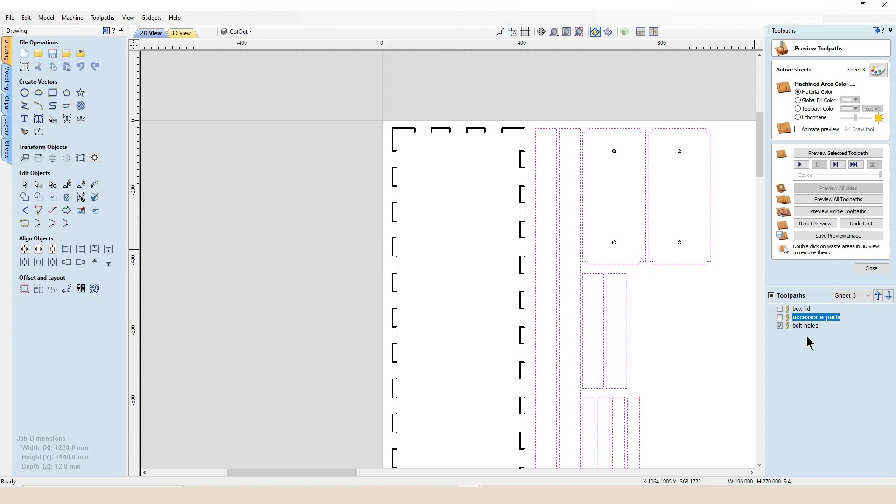Okay, so I've got my toolpaths named. I'll just come back over to this sheet and I've got my box parts to rename.

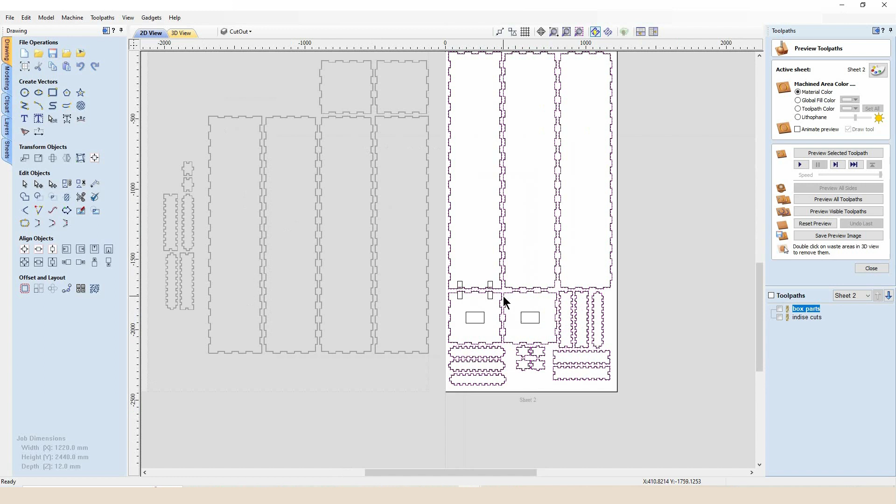So as you can see, we've cut down all of that cutting into 2 separate toolpaths, using all of the same cutter. As you come back over to this second sheet, you can see again we've cut everything down into 3 separate toolpaths, again using all the same cutter.

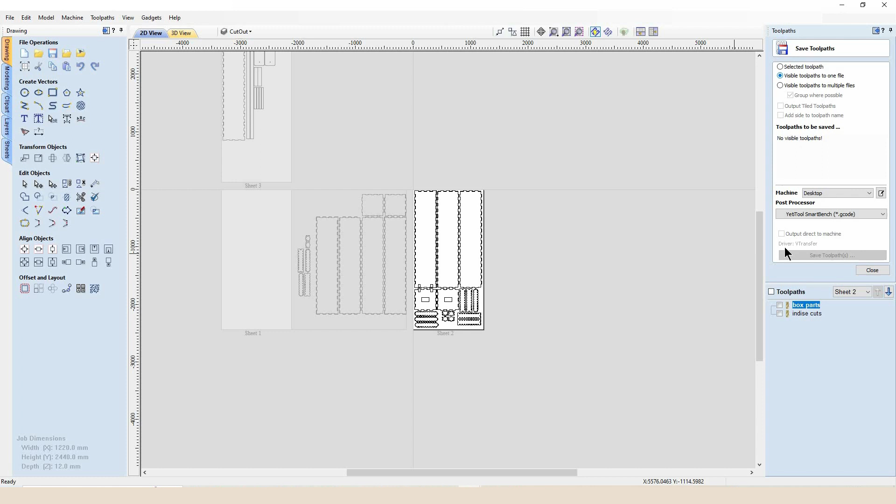So if you wanted to be efficient in regards to your toolpath strategy, you can come over to save toolpaths and select this middle option, which is visible toolpaths to one file. You can then select the order to cut all of the outside box features and then cut all of the internal parts.

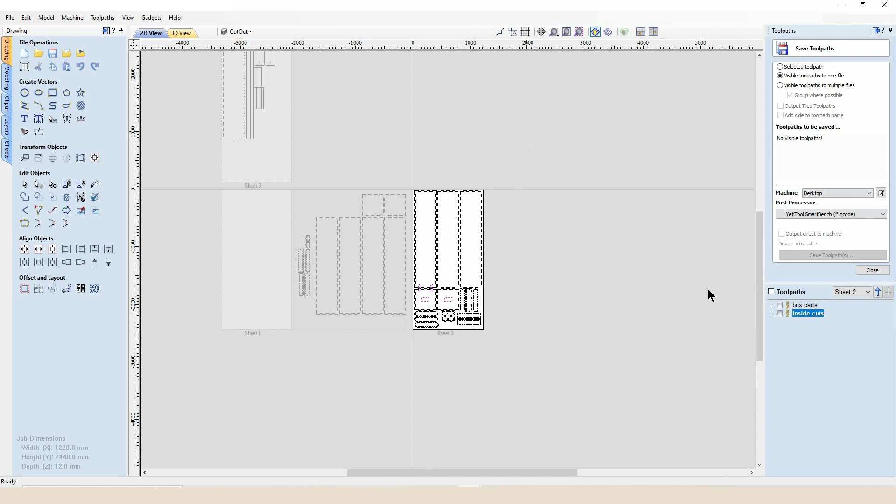Alternatively, you could pick up this toolpath, move it to the top. Then as you select it, it would cut all the internal cuts first, then all the external cuts. So you've got ultimate options to move everything around, to do things in the order that you feel is most appropriate.

And also as I select the 3D view, if I click on my toolpaths, it's going to show me all the paths that the CNC is going to make. So all of these red lines are called your rapid moves. It will start to show you in what order these different things are going to be cut. So the machine's going to move up from our datum, move down to this one, across, up and across.

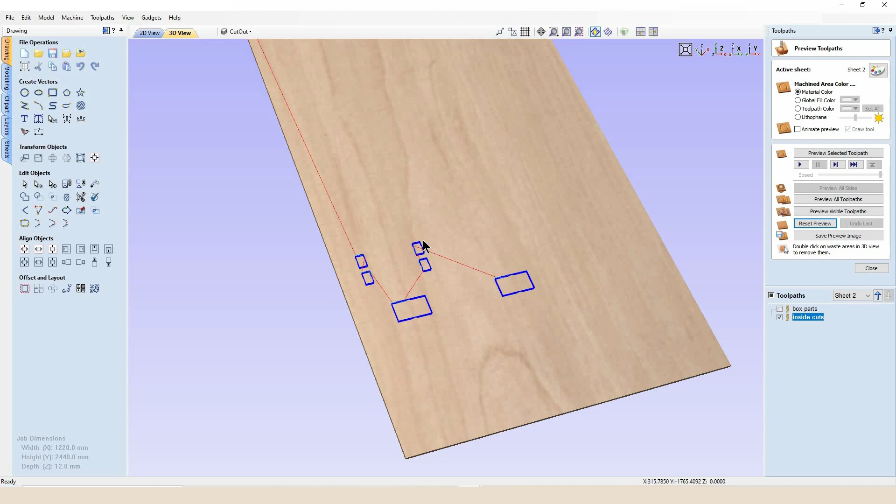So again, you can always go into the toolpaths and change the vector selection order to get it to run exactly how you want it to function.

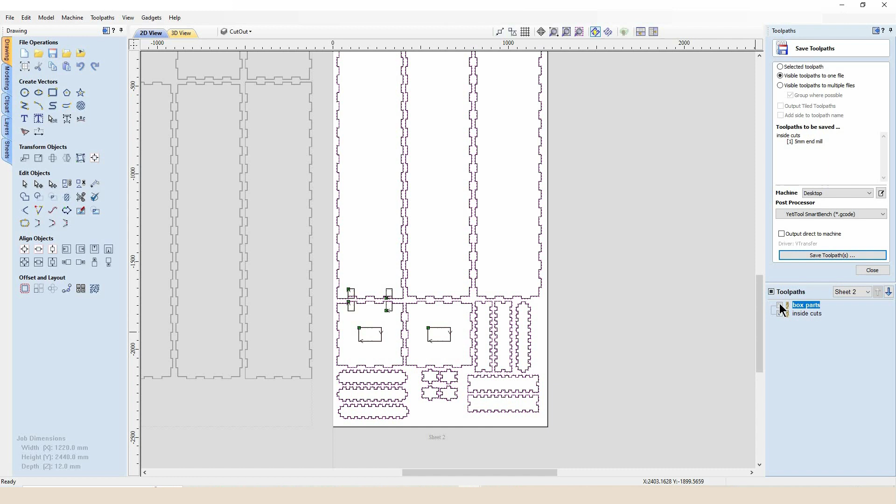Okay, so just as a recap, you can come over to save. You can save each toolpath as a separate entity if you wanted to break it down into separate parts. Again, you could go into this box parts and separate this so it cuts those 2 in one file, cuts this on one file. You can play around with it, get it exactly as you want, but the most efficient would be to select the visible toolpaths to one file and select both of those. And as you press save for your G code, that's going to save that into one nice neat file for you. So there you have it, folks.

That is how we designed the X-Beam flight case using VCarve Pro, which we cut using SmartBench. If you would like to make this flight case yourself, please follow this tutorial, or alternatively you can download the file free of charge in the description below.